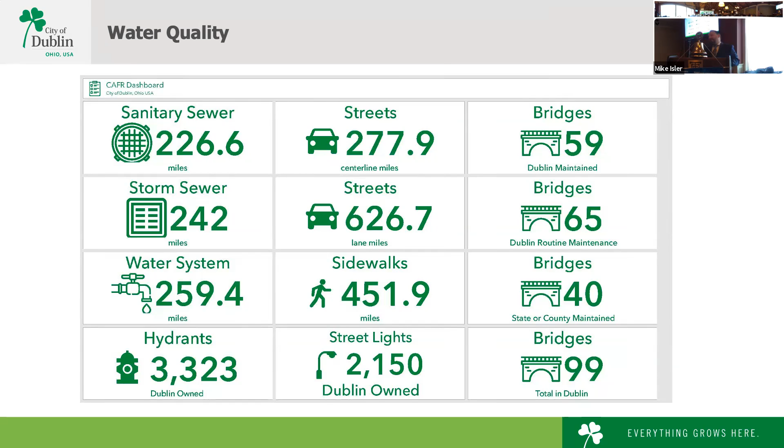All right, this is the second and last question. How many stormwater basins—a lot of times we think about those as ponds, but engineers think of them as stormwater basins—how many of those do you think we have located in the city of Dublin? 200, okay. 60—it might be 60 on the golf course. Define what it is, a stormwater basin: think about a receiving pond that would have storm sewer pipes that could be outletted into it. 75.

The answer is 581. The city of Dublin owns and maintains 195 of those. So again, when we talk about maintenance, that becomes very important.

One of the things we're blessed with, but at the same time becoming an issue, is how new most of our infrastructure is in an engineering world. A stormwater main or sanitary main that's 10 to 15 years old is not near its life cycle. Stormwater basins, some are getting to the 15, 20 year age. What that means for planning is there are times when those ponds will need major maintenance, so we're working with city council to plan for those things, because as they accumulate silt and sediment, eventually they'll stop working.

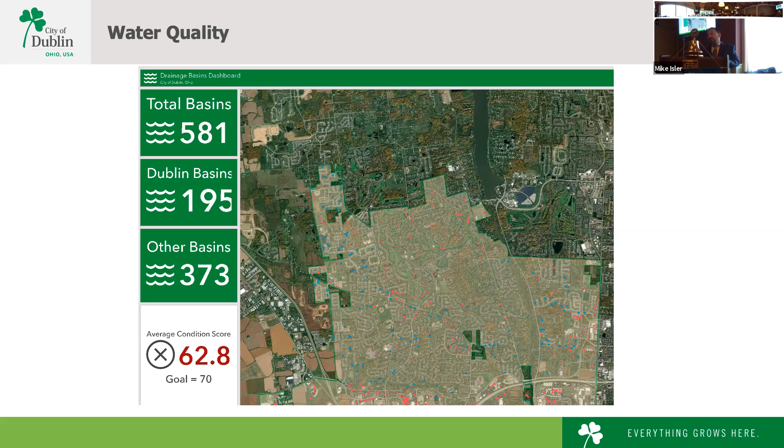So that's one of the things when we talk about the number and scale of what we do. We talked about those numbers, we talked about the scale. So the question is, why do we have so much infrastructure?

When we talk about stormwater management, that relates most to water quality. It's important for us to meet Ohio EPA requirements, and the city of Dublin has its own stormwater management requirements. Dublin is unique in that it has controls not only for water quality, reducing silt and sediment that goes into streams and rivers, but also quantity control.

What we mean by quantity control is each time we put in a new stormwater system, we design the release rate, how much water will outflow from those ponds into our streams and rivers. This is important because it ensures our streams, rivers, and floodways aren't causing flooding or damaging property downstream.

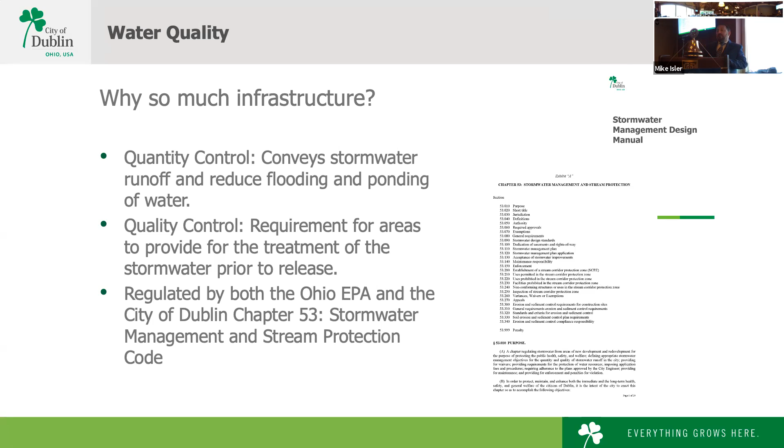The Ohio EPA also has requirements, so any development coming in will provide detailed designs. Most of the ponds you see throughout Dublin are engineered and designed to function and meet those requirements.

We talked about stormwater retention basins, that's the main way Dublin treats that water. Typically, they allow the silt and sediment in the water to settle out. So when we talk about major maintenance, envision water coming in, fine particulates, silt and sediment settling into the bottom of that basin. Over time it builds up, and eventually that storage capacity is gone. Those are the things on our forefront when we talk about major maintenance.

Some questions you might have as an engineer: you go down to Bridge Park, you don't see ponds. So maybe the question is, did you guys just ignore those requirements? The answer is no. What you would see if you could peel back the pavement, the sidewalks, the beautiful area down there, is underground structures.

There are mechanical systems underground that actually handle, treat, and release the stormwater. As we develop more dense areas, you'll see fewer ponds and more of these things happening underground. So it's not that it isn't being treated, you just can't see it. Actually, our code prohibits ponds in the Bridge Park area.

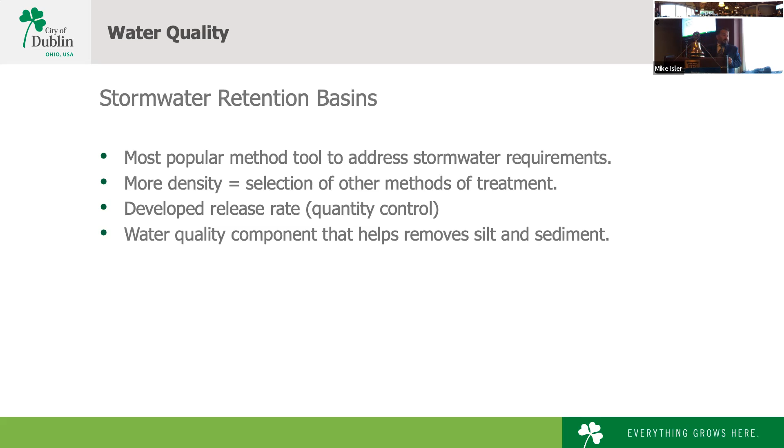Sanitary sewer systems - when we talk about water quality, a lot of people might wonder how that's related. Hopefully we don't have sanitary tied into anything that gets into our water systems, but there's a lot we have to do to preserve water quality with that.

Our sanitary sewer systems are also lucky with the age of our system. There are communities, Columbus is one of them, that because of the age of their systems have what are called combined systems, where storm and sanitary mains are combined. In our world, we do not want that, we want to keep those things separated. So when we think about water quality in our sanitary sewer systems, some of the things we do are maintenance activities.

We spend, on a biannual basis, about $1.5 million on a program where we go into older sanitary mains and provide cured-in-place liner. It's a resin-based system that we inject into the sanitary sewer, applied with high heat, and it preserves that sanitary sewer and provides a lining.

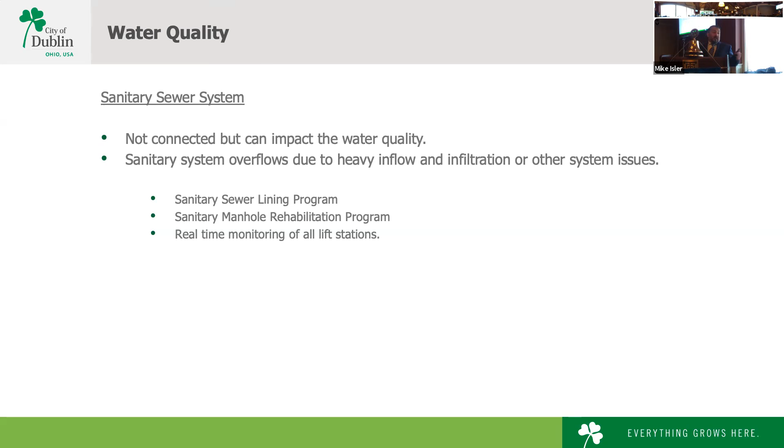In heavy rain events, that can mean there are times where the sanitary sewer system could become surcharged, and we would have effluent coming up and out of our manholes. We do not want that ever to happen - nobody wants that to happen. So to preserve our water quality, we spend a lot of time and money making sure these things are operating as best as we can.

I think at last count, when we had those analyzed, there was 347. That's quite a bit. So one of the things we've moved forward with as a council initiative is an unserved area program.

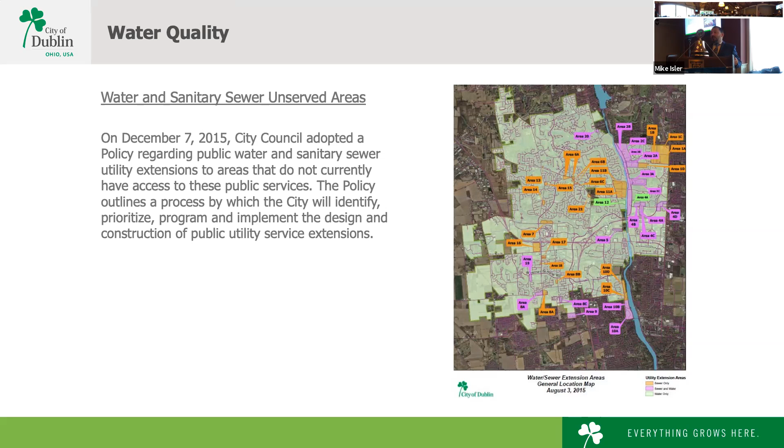What that is, is city programming of public improvements to be able to extend public sanitary sewer and water mains to these areas. It's a 15-year program.

The other map that shows up there - in 2015, working with Franklin County Public Health, we had a health survey done of all of those areas. What's important about those septic systems is when they fail or stop working, there is a high potential for them to start getting some of their outflow into our open waterways and our groundwater, and we want to protect against that.

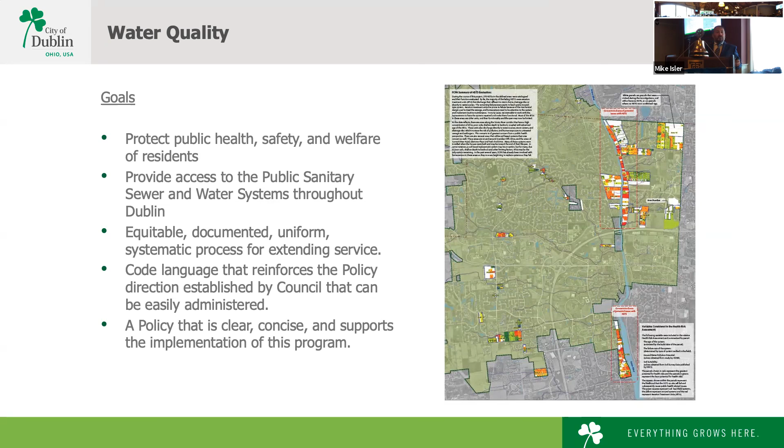So we are encouraging and trying to get as many of these off septic systems as we can. It's a 15-year program that we program into our 5-year CIP. This year, I think we're doing two different projects, about $3.5 million. Next year, we'll do about $5 to $6 million of public projects to bring these new areas online.

The last thing we're going to talk about as far as our programs is our waterways maintenance program. When we talk about waterways, we're talking about open channels - our streams, our rivers, even drainage ditches. Why those are important are all the things we talked about today - being able to convey stormwater and reduce flooding, but there's more beyond that we're looking at.

There's riparian habitat, and all that really means is the natural environment that is connected to that stream - think about the vegetation, the trees, the things along those streams and rivers that we want to be able to preserve.

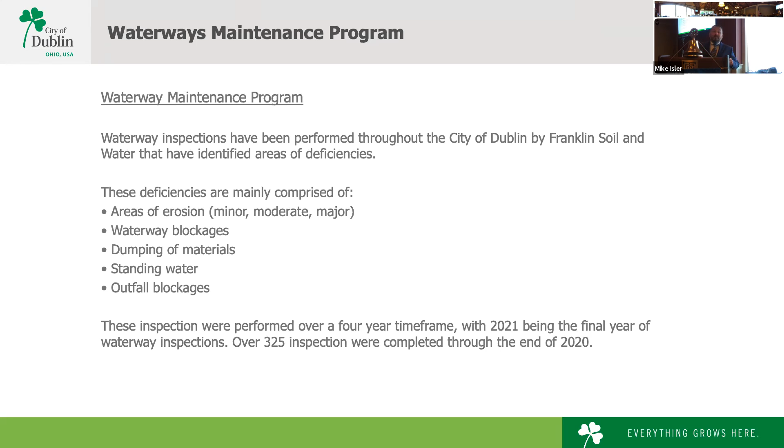Some initiatives the city has taken to preserve that: one, we have a stream protection code. What that says is, in areas we've highlighted - basically any of our open waterways - when a developer comes in and wants to develop or lay out a new subdivision, if there's a stream corridor protection zone, think of it as a buffer coming off that stream. It says yes, you can develop, but there is an area we need to preserve along that stream and river. Purpose for that is erosion control, maintaining habitat, and also keeping buildings, structures, and grading away from that floodplain to preserve our flood carrying capacity.

Along with that, Franklin Soil and Water District - we contract with them for a lot of our services when it comes to streams and rivers. Some of the things they do is go out and walk every single one of our streams, which is miles.

Some of the things they'll look for - they'll go out and identify any illicit discharge. All that is a fancy word for outlets or things that are piped or connected to that stream.

What we're looking for when we find those is we're making sure that they're permitted, they're proper, and that we're not having things sent into our rivers and streams that we wouldn't want. So we have that as a biannual program where we'll go out and have that done. As part of those, we try to eliminate any violations we have.

There are a lot of things we're looking at to make sure we're protecting those waterways. The map you see here is zoomed in on the Coffman Park area. I walk this area a lot, it's a beautiful area. One of the things we had them do is walk all of our waterways. It was over a 4-year period because it's quite a bit. They've done 3 of the 4, and this fall will be the final, and we'll have all of our streams and rivers walked and inspected.

Each of those blue dots on the screen are instances where inspections turned up issues. Generally what they're looking for is whether there are blockages in the stream. We found metal drums just sitting in those streams, grass debris, those types of things - areas we want to clean up, looking for violations, making sure we're keeping that area protected and preserved.

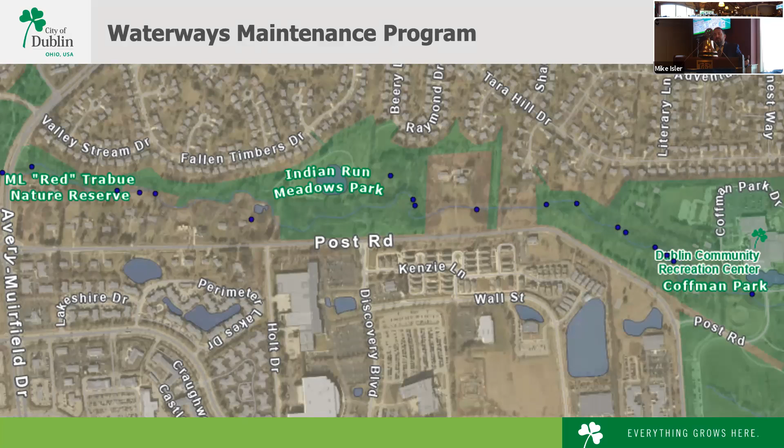Making sure it can preserve the flood carrying capacity. So for the first 3 years, we have a little over 325 different inspection reports. We have the final area, which is north of 270, east of the river. If you can see the upper right corner of that map, that red area, that is what we have left to walk.

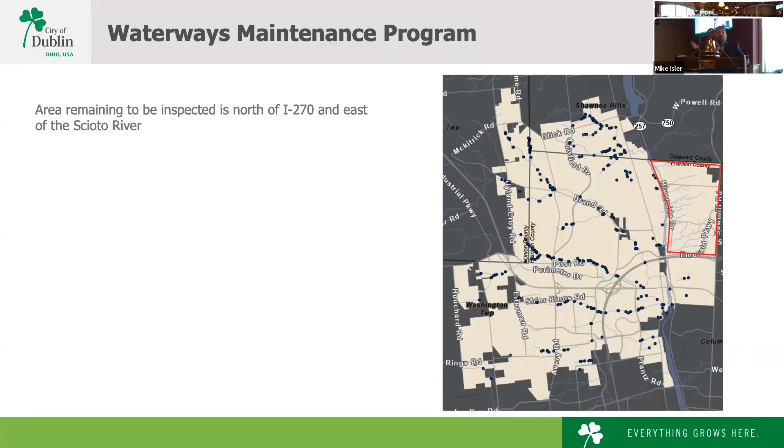So at the end of this year, when we have that, the question is, what are we going to do with all those inspection reports? What we're working with now is a consultant that we're going to work with, to take all of those inspection reports and come up with a program. That program is going to take a look at those areas and say, here are all the issues - let's prioritize what needs to be removed, let's figure out what we need to do. Then you'll start seeing that program turn into a project and start cleaning those areas up.

One of the challenges with that area, as you can imagine, is not all of the waterways are under Dublin's control or jurisdiction. So there are times when we get a call or concern about different waterways, and we are handcuffed to an extent because there are no legal easements - it's private property. There aren't things we can do to address those issues. So part of that program is looking into how we solve that problem when it is private property, but things do need to get taken care of. There are a lot of different options, a lot of different ways that can happen, but that is definitely a challenge when we think about that program.

The last thing is with waterways - one of the things we also administer is the floodplain management program. FEMA has designated mapping that shows floodway and floodplain. The only difference between those two is floodway would be somewhere where we'd expect in the normal flow of our stream where you have travel of water. When people are developing or want to do activities in that area, we have to keep that area free and clear, and that is required by the federal government through FEMA.

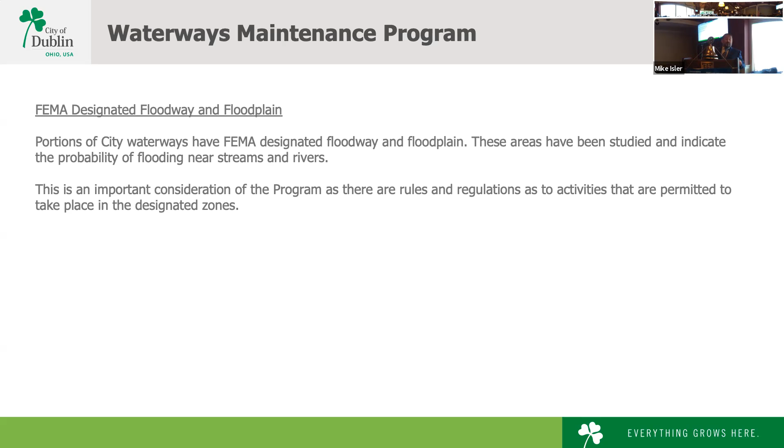Floodplain is a little bit less strict. There are things you've probably heard of like the 100-year floodplain - some properties may have that designation. As we look at those areas, there are certain permitting things we have to check. Again, that makes sure we're keeping and preserving not only the structures, but making sure we're maintaining that flood carrying capacity.

So there's a map, and when you look on that map in that area, can you guys pick out the blue hatching that's on that area? That's when we look at our mapping - this is actually available, there's DubScovery, our GIS system that's through our city website. If you're ever interested in those types of things, that is available on our public website. This is our mapping system where we can look at those areas, and if you notice the development pattern around those areas, you can see how that buffer - those areas of floodway, and then the red is the floodplain - influences the layout of the design and how things are placed when we're working with development.

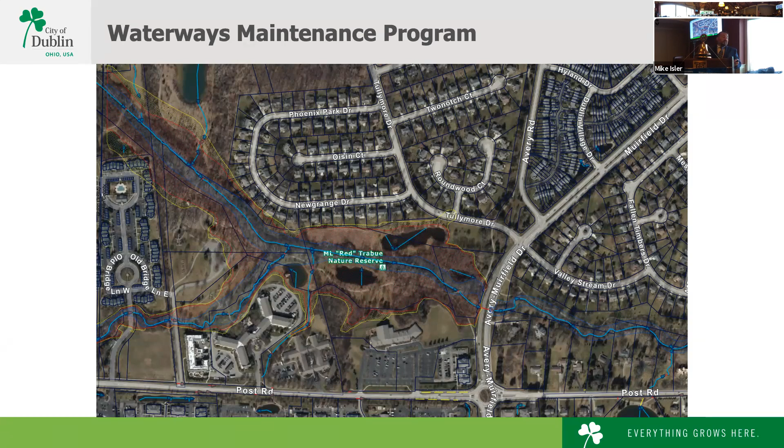Okay, so this is kind of the easy slide. Why is this important, right?

So we talked a little bit about where we get our water, right? What's kind of funny, at least in my world, is the water that we're putting into the storm sewer system that ends up in the river flowing downstream is pretty quickly picked up by City of Columbus water plants, treated, and pumped right back up here. So when we think about those things that get into our storm sewer inlets, that get into our streams and rivers, it isn't too disconnected from impacting ourselves. Those things that get into the water do end up downstream.

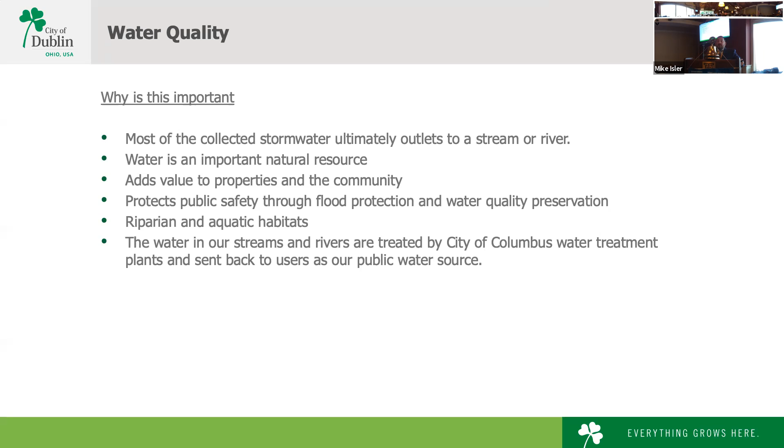One of the things we've thought a lot about when we planned Bridge Park is how we interact with the river with the City of Dublin. It's a beautiful area, a great resource, but for the longest time it was something you pretty much drove over when going to 161. As we develop new river-facing developments that engage the river, along with the park coming online soon, we're really opening up that river for people to get down there and look at it. As that happens, it's going to become more on our forefront about the quality of our river. So all of those things draining into the river, we want to make sure we're keeping up to Dublin standards and doing everything we can to protect it.

With that, questions and discussion.

When we think about stormwater management, one of the things my group handles is drainage requests. We also work with mechanical systems within Dublin called lift stations for sanitary sewer. Almost 90 to 95% of our system is gravity fed, meaning there's no pumping mechanism, no mechanical units helping that flow. There are some areas of the city, though.

Think about some of the homes you'd see around Riverside, between Riverside and the river. A lot of those homes sit lower than the roadway, and the sanitary sewer main in that area follows the roadway. So what you're seeing is a connection to a unit that is lower than that sanitary main. In those areas we have what we call lift stations, which is really just a fancy word for areas where sanitary sewer is mechanically pumped from a lower area up into our system.